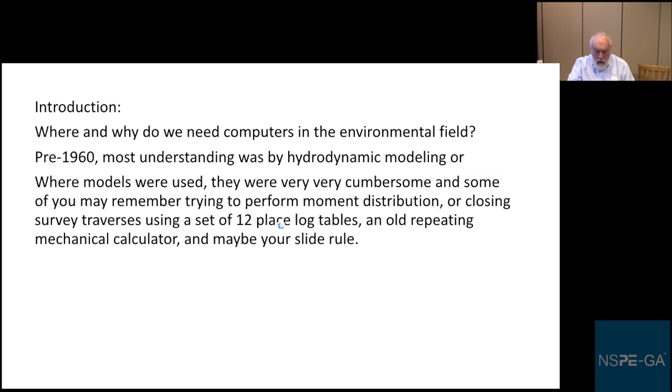Where and why do we need computers in the environmental field? Well, pre-1960, and some of you are old enough to remember that, most understanding was by hydrodynamic modeling, or in some cases graphical modeling. Where the models were used, they were very cumbersome, and some of you may remember trying to perform things like moment distribution or closing survey traverses using a set of 12-place log tables, an old repeating mechanical calculator, and maybe your slide rule. I still have a slide rule. So, as a result, the calculations took hours and the results were crude.

Solutions to the partial differential equations were all analytical. With the advent of the computer, our knowledge exploded. Analytical chemistry exploded. Detection limits used to be at 5 to 10 milligrams per liter for many compounds. Now, they're measured in terms of 0.01 parts per billion. And that's 0.01 part per billion is 1/1000th of a milligram per liter.

There's an old story about a guy who walks into a bar and he tells the bartender he wants a dry martini. He says, "Here's how I want you to make it. I want you to take a clean glass, rinse it out with gin, throw that out, put in new gin, and then whisper vermouth across the top of the glass." The guy does. The guy takes one sip. He turns to the bartender and says, "Loud enough."

And that's where we are. That's where we are with our chemistry. That's where we are with a lot of our analytical abilities. All right, with the explosion of the calculation ability, our understanding and ability to make models and to understand the environment also exploded. We now started to look at things that we didn't know were even there before.

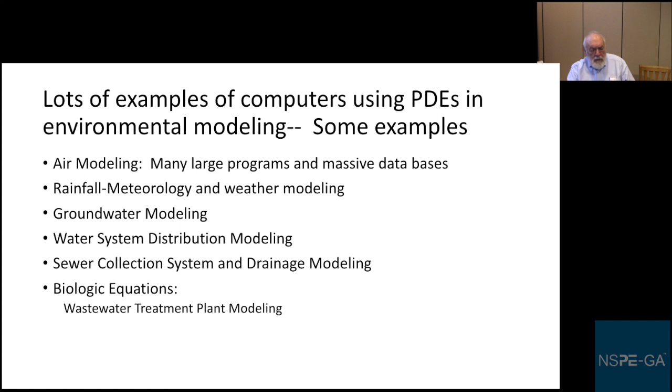Many of these models require numerical solutions because the solutions are too difficult or impossible to obtain analytically. Water distribution and wastewater collection systems are solved using relaxation and superposition techniques, techniques, surprisingly enough, that were developed by Hardy Cross in the 1930s and widely used in structural analysis and some flow problems. It's good for water distribution systems, anything that you have. For example, you can use it for heat transfer up to a point.

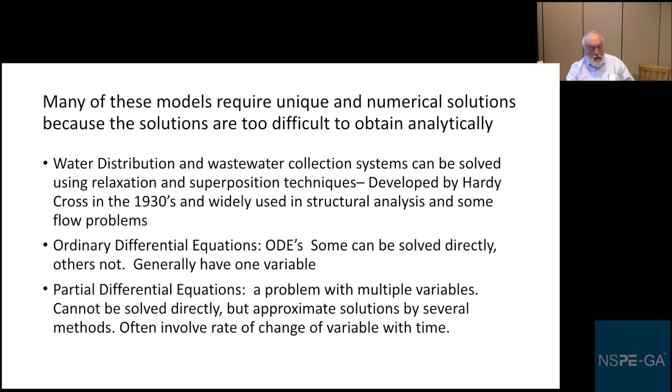Ordinary differential equations: some can be solved directly, others not. Generally, they have one variable. Partial differential equations, a problem with multiple variables, cannot be solved directly, but approximate solutions by several methods often involve the rate of change of the variable with time. And I have a little example here.

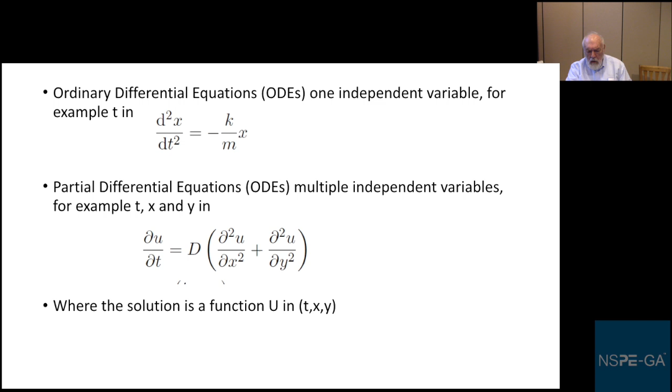An ordinary differential equation has usually one independent variable, whereas a partial differential equation, you can see that you have the terms du/dt, a constant, and this second degree partial of u with regard to two different directions. So they are a lot more difficult to solve.

Let's see if I've done that. Yeah, this is, for example, an air pollutant. This is Fick's second law of diffusion. When you have heat flow, and that's where it's mostly used, in the X and Y plane. For example, if you're looking at a membrane, the concentration variation across a membrane would be all in Fick's law. It's a nasty little equation, but solvable.

Now, the way that they solve some of these equations, they use forward, backward, and central differences to approximate. For ordinary differential equations, we need to know the initial values to be able to compute the solution. For partial differential equations, we need to know the initial value plus behavior at the boundary. For example, does the boundary have a fixed constant? Does the boundary have a gradient? And in most environmental applications, we're into these second order partial differentials.

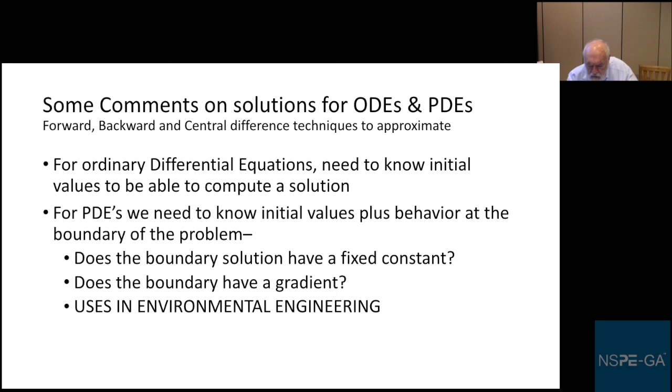Air quality monitoring often involves not only stack testing, but computing downwind concentrations for particulates and gases, CO, SO2, NOx, and so forth, but particulate less than 10 microns. Some dusts, particles that the EPA is very concerned about, are as small as 0.2 of a micron. And when you're down at that size, basically it doesn't settle. The problem with that is it's respirable and it collects in your lungs.

Atmospheric pollutants are hard to model because of things like atmospheric turbulence. Now, how many of you here have ever dealt with boundary layer and shear problems? A couple. And you're talking about mixing length and things like that. It can be nasty. Eddy currents, chemical composition, greenhouse gases and everything else, heat flux or solar and natural changes, air density with viscosity and with height, and reflection from the ground sources, plus the velocity due to wind.

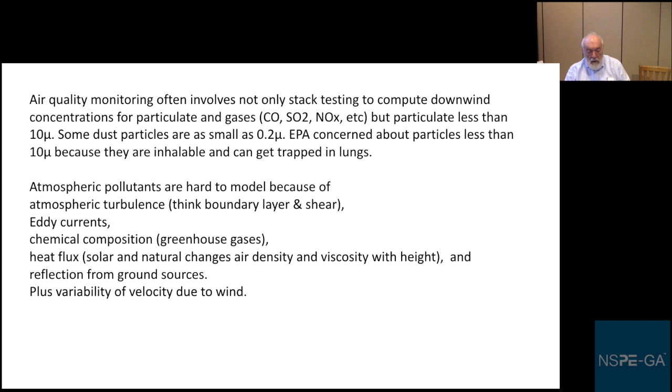If you're going to start with a new plant, in some cases, you may have to go in the assumed downwind direction. Run some models for what you anticipate the stack height is going to be. Compute where the ground impact might be the greatest, and then set up and run monitoring stations at those locations and run them for 3 or 4 years just to get enough data to confirm the model that you have, and then you can get your environmental permit. It's nasty.

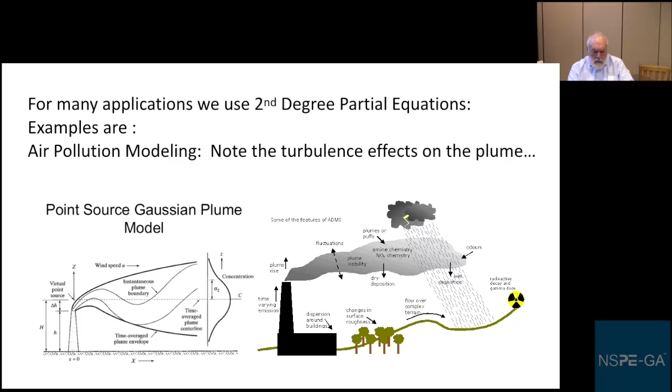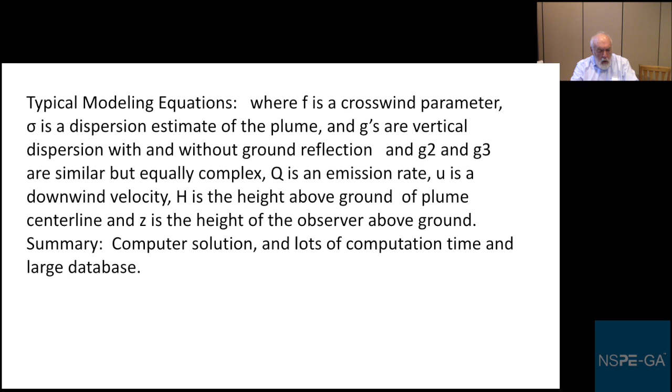And when you try and put this all together, the thing about groundwater modeling is that you can't afford to get all the information you'd really like to have. You're always operating in a strange environment, just because every time you run one of these wells down, you're talking $30 to $40 a foot, maybe more. And the analyses for something like groundwater, I've seen them run as high as $200 and $300 per sample.

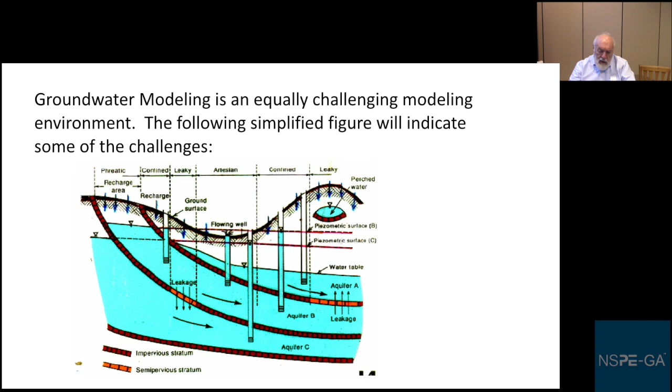For example, when you pull water out of a well, you create a cone of depression. And that cone of depression changes with time and your drawdown. What's happening is you have a certain amount of water, the speed will vary. And then when you start looking at putting in some contamination here, for example, how long will it take till it's affecting you here? That could be months, it could be years. You're trying to figure it out, again, with highly limited data.

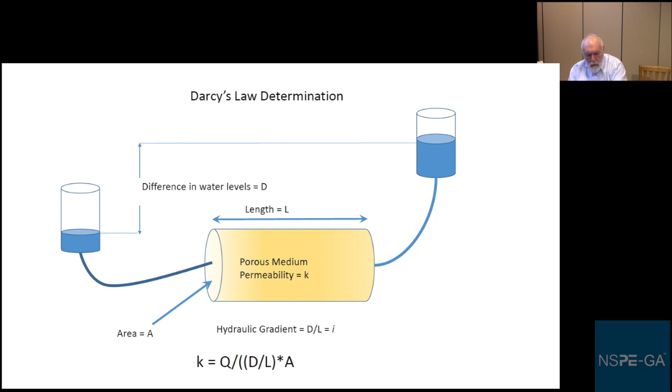All right. What did I do? Wrong way. There we go.

Consider the various sources and withdrawal plus the transport equations. And right in here, we ran into a problem because the equation did not translate. But trust me when I say it's a second degree partial differential equation in 3 dimensions, x, y, and z. And each of those terms is partial whatever squared over an appropriate boundary.

So variables include permeabilities in one to 3 directions, leaky and discontinuous aquifers, which I mentioned, grain size of the aquifer, hydraulic gradient, movement, withdrawals and their effects, type and solubility of pollution, density, viscosity, two-phase flow, you name it. Phase interactions and solubilities. Let me just say that it's a mess.

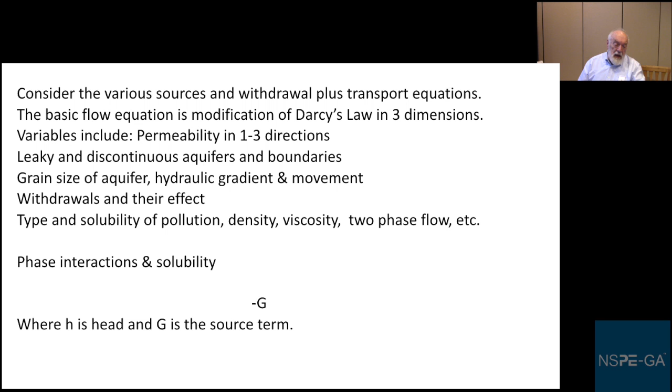All right. Since many second degree PDEs cannot be solved directly, numerical solutions such as finite element and finite difference are often used. But there's a caveat. Finite difference solutions are good and easy to program. They are useful where boundaries are regular and preferably regular, such as linear cubes and rectangles.

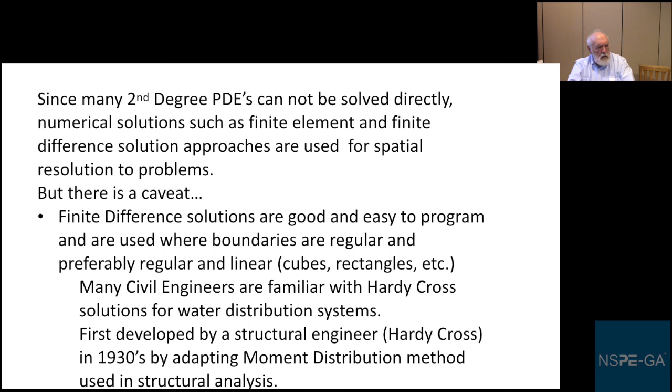Those of you who are structural engineers remember moment distribution that was done by Hardy Cross. He was a structural engineer, and he helped develop the whole idea of successive relaxation. And it's been adapted for certain things. For example, if you're analyzing a water network of distribution piping, you can use a Hardy Cross type technique. So, all right. The second thing is finite element.

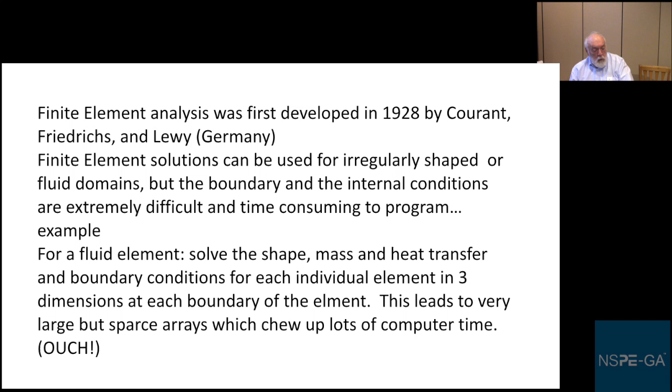Now, finite element was first developed in 1928, and it can be used for irregularly shaped or fluid domains, but the boundary and internal conditions are extremely difficult and time-consuming to program. For example, for a fluid element, you have to solve the shape, mass and heat transfer and boundary conditions for each individual element in 3 dimensions at each boundary. This leads to very large but sparse arrays which chew up lots and lots of computer time.

Pardon me. So those are some of the methods we have of solving second degree partials, and I said I wouldn't get heavily into math. More than one type, generally speaking. There's parabolic, elliptical, linear, and nonlinear, and hyperbolic, and so on. Each has a preferential solution. The math is complex and exhaustively intense. Too heavy for this presentation.

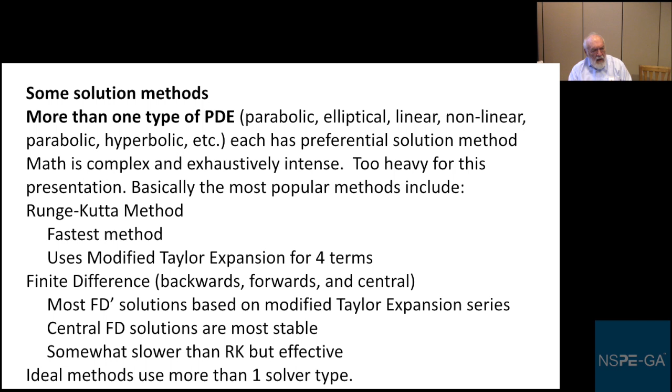The preferred method for many differential equation solvings is Runge-Kutta. It's the fastest method. It uses a modified Taylor expansion for 4 terms. You can use, as I mentioned before, finite difference, backwards and forwards. Most finite difference examples are based on modified Taylor expansion series. They're somewhat slower than Runge-Kutta, but also effective. Ideally, you want to have the option to take different types of analytical solutions and maybe use them simultaneously.

I've got 3 or 4 books on it at home, and I sit down periodically when I feel the need to be a real masochist, and then wind up pounding my head against the wall after a very short period of time.

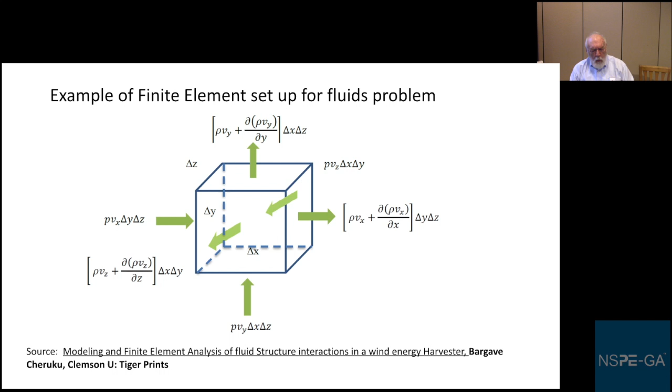The more complex the problem, the more difficult it is to solve. Specific problems have specific solutions. Meeting multiple boundary conditions can be challenging. You don't superimpose additional elements in your problem because it soon becomes unworkable. The size of the elements is also critical. The problem can blow up if the time and space elements are too small. For example,

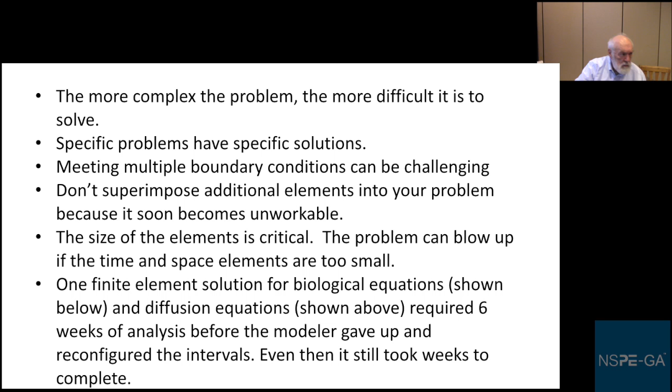one guy I'm acquainted with and working with had a finite element solution for biological equations. It involves the diffusion equations for cells and biology. It required 6 weeks of solid computer time before the modeler gave up and reconfigured it because he had his element sizes too small. He was going to get something, but it was going to take several more weeks. So at that point, he gave up and reconfigured. These are big computers that are paying by the hour or minute or what? Yeah, by the minute.

So, all right, another solution is to organize some of the equations into matrix arrays and use existing libraries to help solve the matrices and produce solutions. There is a need to keep the time and distance steps small, or instability results. This leads to very large sparse arrays. And by a sparse array, there's lots and lots of zeros. You'll see a 1 here, a 3 there, scattered all throughout. It's mostly zeros, but it still chews up an awful lot of computer time.

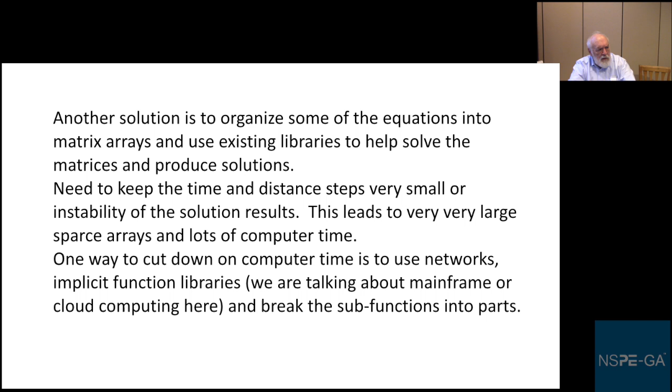Several of the larger computer systems are using networks, and most of this stuff is what we used to think of as mainframe type stuff. So for serious modeling, you're talking MathCAD and some of the major computer software programs. You're talking very small time,

Finite elements, yeah. How much? What's very small? That can give you a strange but accurate answer. It depends upon the size of the grid you set up. This problem I mentioned, this guy was trying to model an area that was, I think, 8 feet wide, 5 feet deep, and 30 feet long.

And he tried to model it, and just the heat and mass balance conditions were just too much for him. And 6 weeks worth of computer time just blew up. A good finite element model, you're talking in terms of thousands of dollars, and most of that is computer time.

So he's operating in inches or feet? He's operating in feet, and I forget exactly how tight his grid was, but he was trying to really define some of this. He was an experienced modeler. He just made a mistake. He guessed wrong on the size of the element.

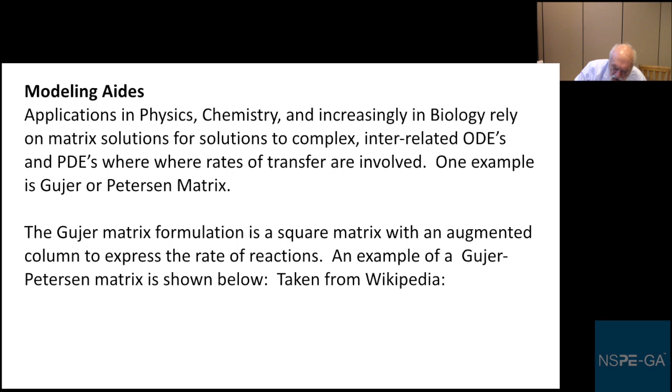So you have A plus B transforming into C, and you've got some rate between A plus B and C, and then you may have some biologicals. Let me go to the next slide and I'll show you. One of the ways in which biological models are solved is the Gujer-Petersen matrix, such as those involving chemical reaction plus bacterial action.

And what you have there is, for example, A plus 2B goes into a product S, and this is a reversible reaction. Another compound, E, combines with S and makes ES, and then you get E plus P. The second equation represents a bacterial reaction transformation. And the analysis is a simple equation. Looks like this. And this is the Petersen matrix.

And you can see how they set the thing up. Second order formation of S from A and B: those are the coefficients of A, coefficients of B, coefficients of S, and then the other things are zero. But there's a rate coefficient there. It's straight chemistry. P2, formation of ES from E and S. So actually what happens is these disappear and form this. And that has a rate coefficient.

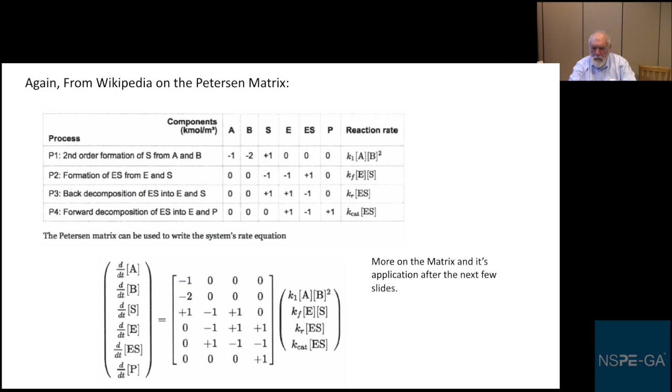One of the most common uses of biological equations in the Petersen matrix is for sewage systems, activated sludge. The activated sludge process was first developed in 1914 by Ardern and Lockett. Since the mid-1970s, the emphasis has been on better treatment, nutrient removal of nitrogen and phosphorus, water reuse, and removal of traces of personal care products. The result is that wastewater treatment plants are starting to look more like advanced chemical plants.

Back in Lake Lanier, about 10 years ago, we toured that facility. Okay, the F. Wayne Hill plant? Yeah, I think that's what it is. But the water quality coming out of that plant is actually better than the water quality in Lake Lanier. So we are recycling water.

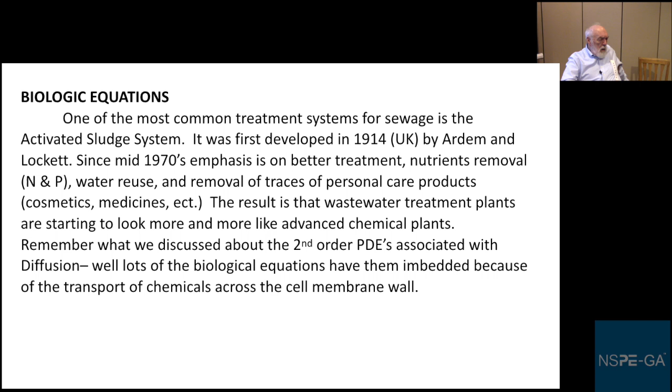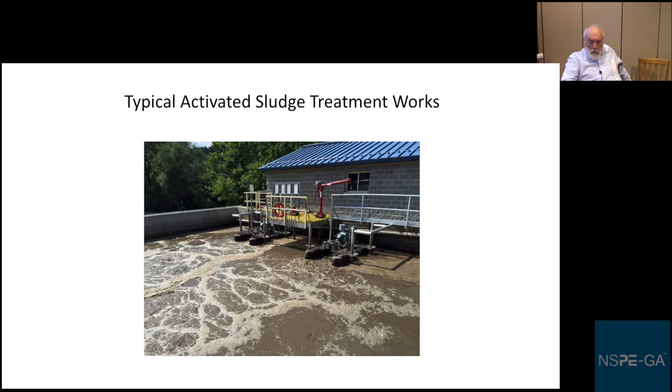But here's what a typical activated sludge treatment works looks like. You've seen the one up at Gwinnett. The International Water Association, which is out of London, and a number of European universities developed a model set of protocols for monitoring and modeling wastewater treatment on a static or dynamic basis. These models are referred to as ASM, Activated Sludge Model 1 through 3, and ADM, Anaerobic Digestion Model, and they've been around for about 15 or 20 years and have been refined.

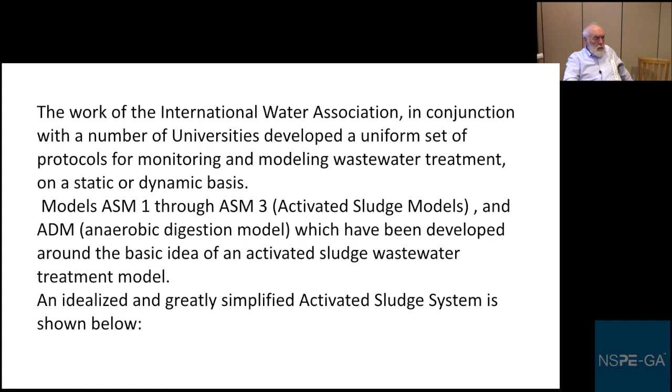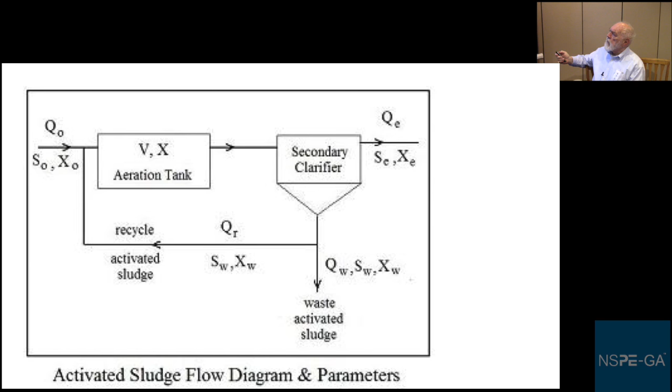An activated sludge system is relatively straightforward until one starts considering the bacterial reactions, growth rates, oxygen chemical transfer rates, the different types of bacteria, and changes in the bacterial populations. And believe me, all those do make a difference in what's taken out of the wastewater. By broadly characterizing many of these classes of organisms and their growth and chemical formulations, it is reasonably possible to come up with a set of equations which adequately expresses the performance of a system such as ASM1.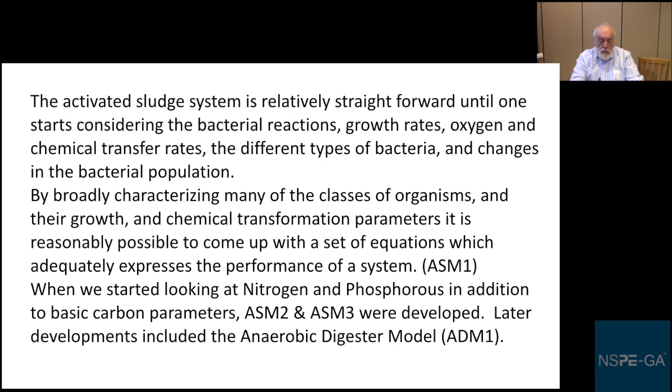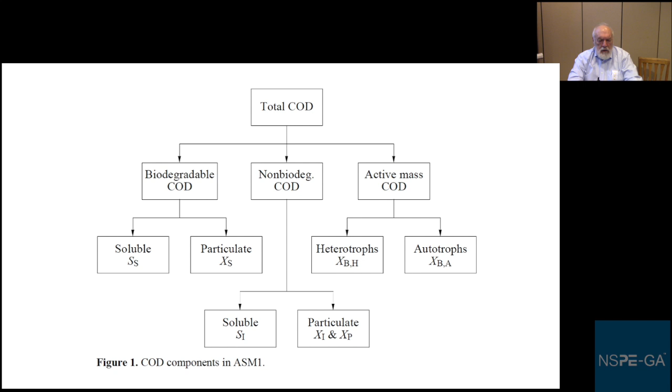When we start looking at the nitrogen and phosphorus balances and the basic carbon parameters, which were developed as part of ASM2 and ASM3, it gets a little more complex. They've chosen COD because COD is a reliable measure. These are your various fractions: some of your COD is biodegradable, some soluble, some particulate; non-biodegradable, active biomass, heterotrophs, autotrophs, soluble and particulate. Now, when you transfer something like that into a Petersen matrix, it looks like that.

And I know it's a little bit nasty to try and read from where you are, but this is the same sort of formulation that we saw here. Various parameters here, and then these are the process rates over here. So they can take this section and multiply it and solve the equations.

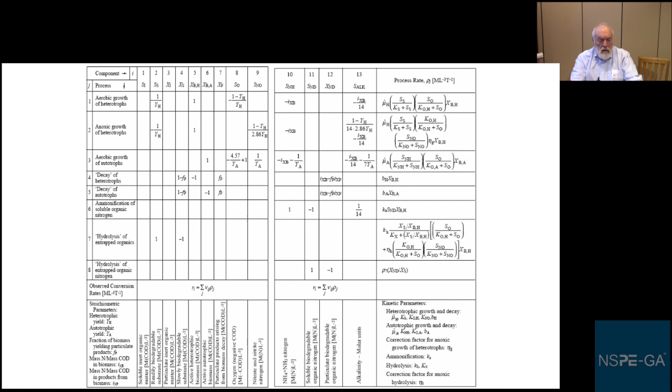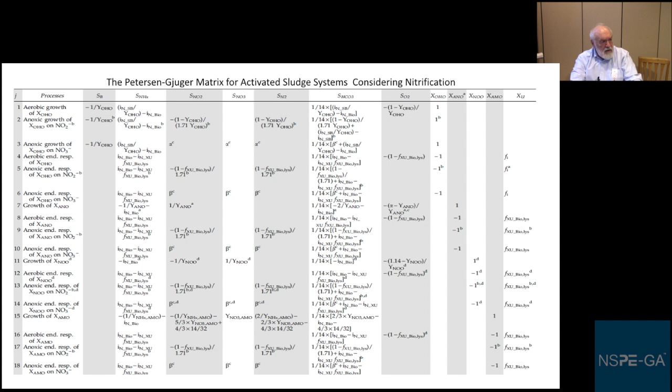And this was just simply for carbon and the soluble fractions of carbon. If you start looking at something that's much more esoteric, like carbon and nitrogen and phosphorus removals, the equation tends to get a little more hairy. And I'm not going to go into that. Just to show you that the matrix for an activated sludge system is rather complex.

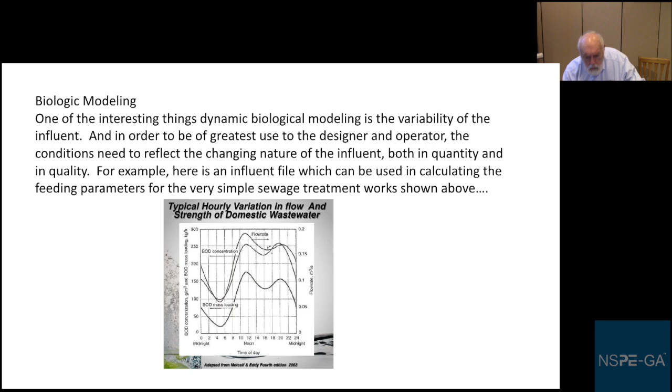One of the other interesting challenges here is biological modeling. You have dynamic biological models, and what happens is your influent is not steady. So your influent, this is diurnal flow over a period of 24 hours. This is what your actual wastewater generation looks like at most plants. And you'll have changes in your variables, along with the changes in your flows. And, like I said, it can get really, really messy. All right.

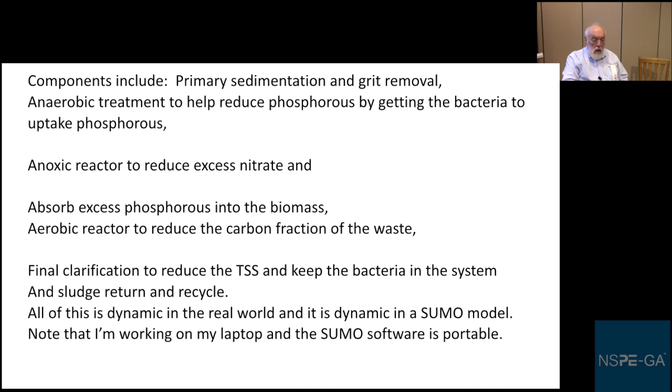So, anyhow, components of that previous thing include primary sediment and grit removal. Let me go back to that slide. I can do it from there. Primary sediment and grit removal. Anaerobic treatment to help reduce phosphorus by getting the bacteria to take it up. Anoxic reactor to reduce the nitrate and absorb excess phosphorus into the biomass. Aerobic reactor to reduce the carbon fraction of the waste.

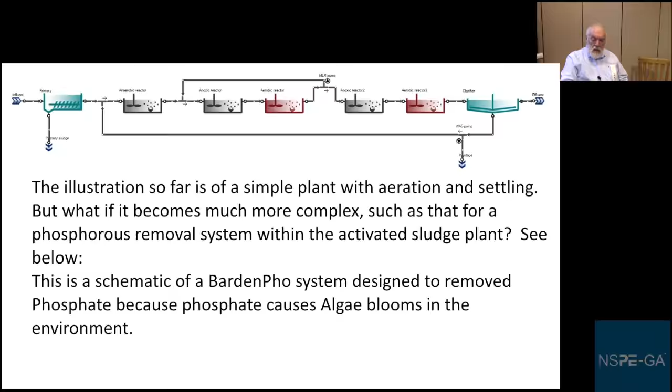Final clarifier to reduce the total suspended solids and help keep the bacteria in the system, and sludge return and recycle. All this is dynamic in the real world and is dynamic in a modeling environment. And one of the things I had planned to do was run a little model of this software that's called Sumo. And it's very highly graphical and it's really kind of neat to watch it, but we can't do it.

Out of curiosity, are you in favor of garbage disposal or not? Is that good or bad? It's a bit of a trade-off, because in one place you're sending lots and lots of stuff down to the wastewater treatment plant. In the other case, you're sending it to the landfill. And so you kind of have to balance the two. I'd love to see us go to a much more comprehensive design where we integrate our landfill. I've seen anaerobic digesters in solid garbage, basically garbage waste. They take it and anaerobically digest it.

A few years back, I helped design a very compact composting reactor as a way to help a municipality get rid of their sewage sludge by making a fertilizer, a soil amendment. So there's all kinds of these possibilities. It's just that every one is just slightly different.